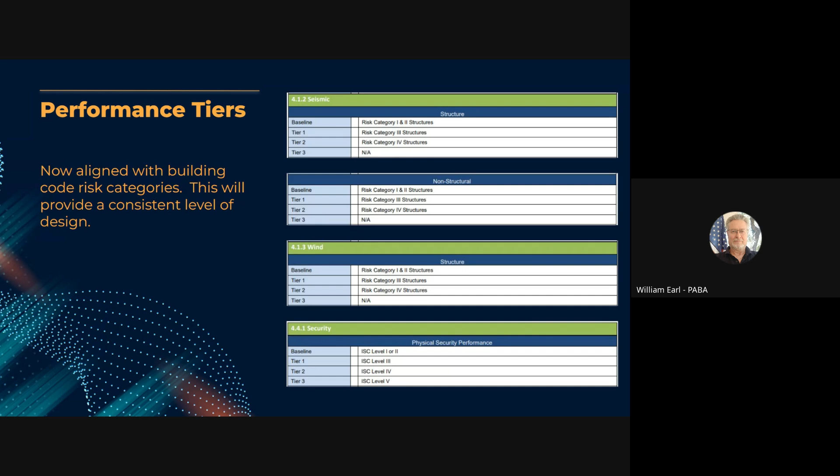Thank you, Bill. I'm Hani Rimawi. I'm a civil engineer. I happen also to be a team member with Bill under the Center of Engineering. So I've been with GSA just shy of 2 years, and coming on board, I took the program management of the civil engineering component here in the P100.

We have some minor updates with a robust change to the flood mitigation sections, and hopefully down the line, as we continue with the updates to the P100, we'll aspire to have a standalone civil section, but we're not there yet, but we hope to be.

Just wanted to share some of the recent news here. It happened earlier this month. The P100 Steering Committee voted and approved the creation of a Civil Engineering Technical Committee. So this committee will be responsible for reviewing any of the waivers that come for the civil engineering section. The group is in the works right now in terms of formation, and we're going to look to have about 5 to 6 members, and have the members at least have coverage across zones A through C. So at least one member from each zone. So that's an ongoing development.

Okay, so the changes we had under civil engineering were minor for the most part, except for sections 4.6 and 4.7, where we replaced the flood mitigation section with a flood resistance design section that also includes a robust implementation of the FFRMS requirement, which is the Federal Flood Risk Management Standard, and also takes the flood requirements that were scattered through different sections, such as mechanical, electrical, and building enclosure, and puts them in one location under the civil engineering section.

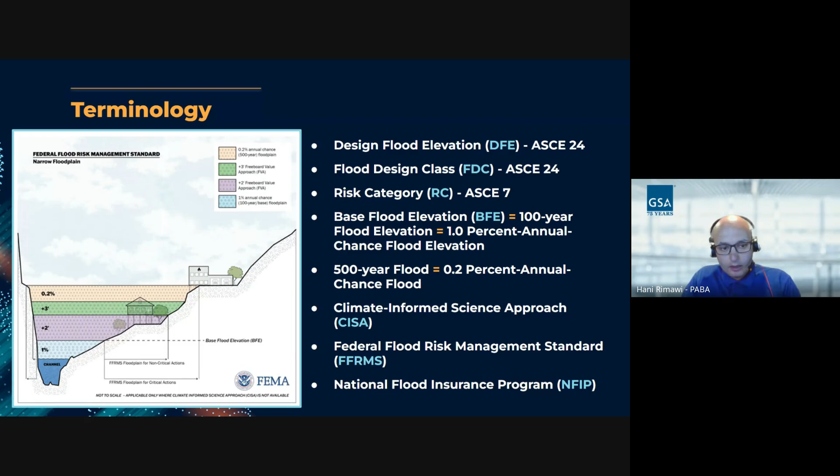So want to highlight here section 1.3.9, the facilities definitions. This was mentioned earlier in Lance's presentation as part of critical action or non-critical action. This is a designation that's essential to have established early on in the project, preferably during feasibility stage. It does have cost ramifications, as you will see in the tables and the next slides. Non-critical action would have a lower standard design. Critical action would have a higher standard design.

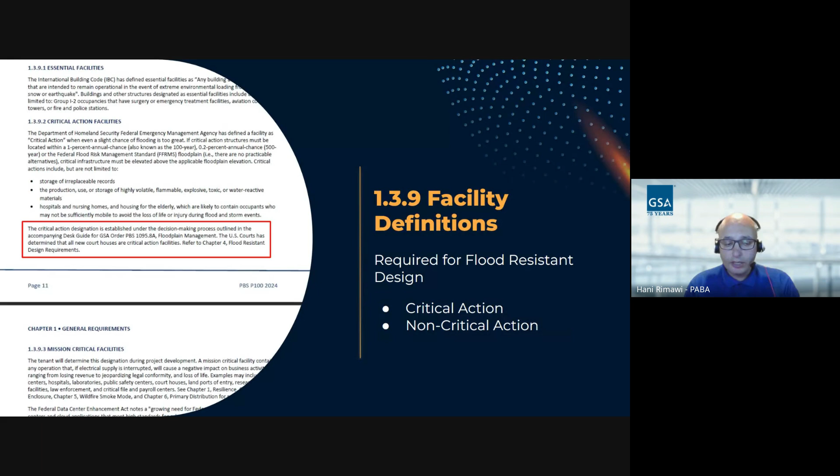And the recent issuance of the Floodplain Management Desk Guide has guidance on how to go about attaining that designation. It would require the customer agency to sign off on a letter letting us know how they want to designate their facility. And if it's something that GSA owns and operates and occupies, then it would fall on us, GSA, to make that determination internally, which falls on the regional level.

So section 4.6, we included the performance table here, 4.6.1. That's a new numbering. Performance, and you'll see the building enclosure on top. So this table is taking into account different categories, one being the building enclosure and site, and then you'll see the mechanical and the electrical and generator in the following slide. So the first slide here, we merged the site, civil, and the building enclosure under one category, and they both share the same design standards.

Under the performance tiers, you'll see two columns, the non-critical action that highlights the design requirement based on the baseline through tier 2. And then you'll see the critical action on the right column, which is the higher risk level to design to. And also you'll see that going through baseline all the way down to tier 2. The DFE term is being used here, again, to be in line with ASCE 24.

For example, for non-critical action, we're looking at the baseline design flood elevation to be the base flood elevation, which is 100 year, plus 2 feet. And then we would have a flood design class set at 2 with the risk category set at 1 and 2.

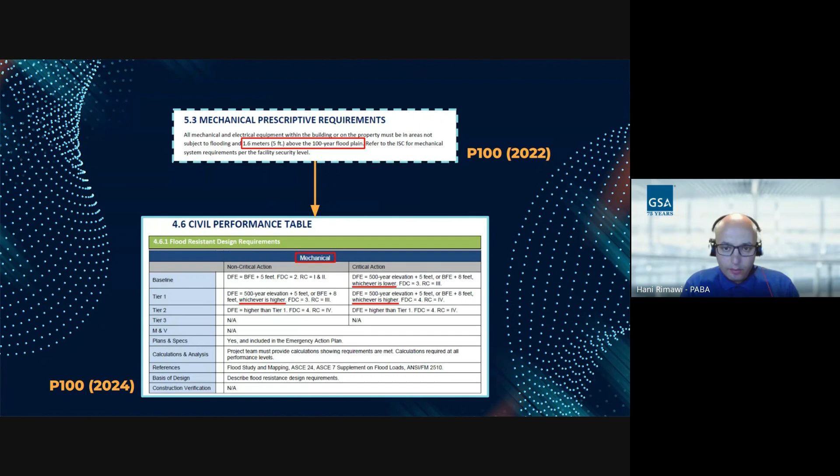So I'm going to the next slide here. Let's see. So the next slide is related to the mechanical. You can see here part of the 2022 section. It was one line. There was no table. It was under section 5.3. We took that and added it into a performance table. And we also created a level for critical action.

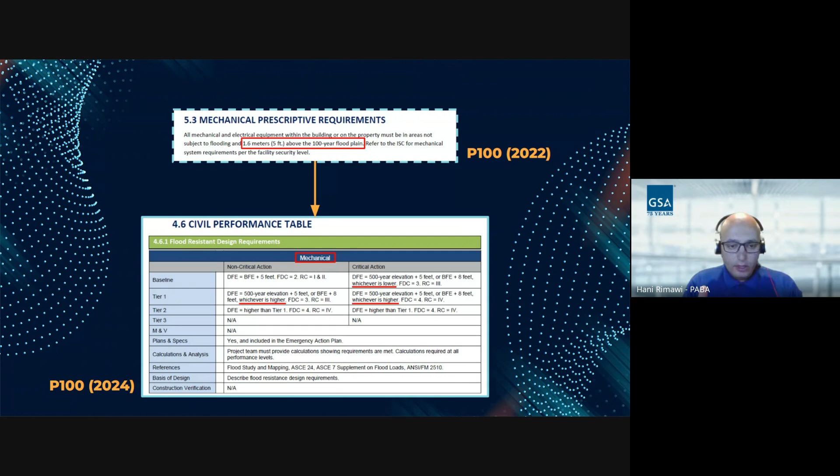So you'll see under non-critical action is BFE plus 5. Under critical action, it goes up to the 500-year elevation plus 5. And this is in line with the electrical components as well. And similarly to the previous table, as you go to the right, it increases, and as you go down the tiers, it increases as well based on risk requirement.

The electrical and generator systems got merged together. Previously under 2022, there were two different sections. Again, the components that were noted as part of that narrative get captured here in the performance table, and they follow, again, the non-critical action designation versus critical action designation.

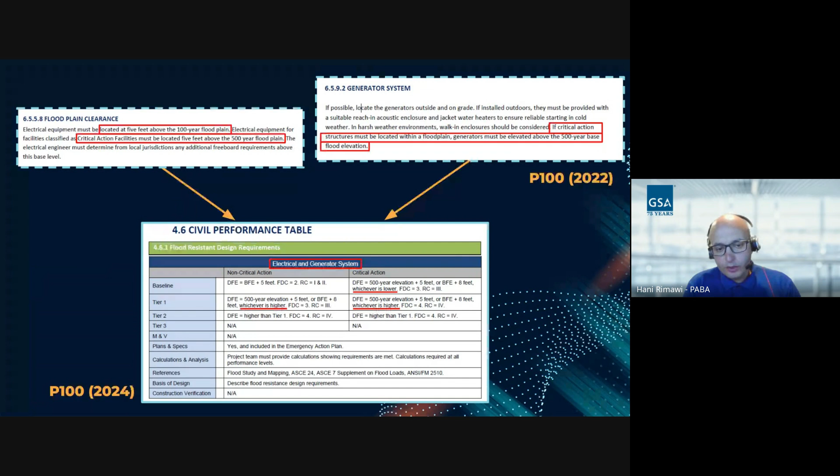Under 4.71, which is the performance attributes, we want to note some of the changes here, being that we have listed available sources for floodplain information, referring to the floodplain management desk guide. In there, there's a list of applicable sources, such as FEMA websites with flood data, localities, or other agencies that might have information they can share.

In the event there's no available floodplain data, we will look for the project team to conduct a hydrologic and hydraulic analysis or flood study to determine and set the design flood elevation. Or if the data that we have, let's say from FEMA, is more than 15 years old, then you should be considering getting a new study completed.

Now, when I say 15 years old, it's not related to the date listed on a map. It's related to the actual analysis for the floodplain, for the riverine or the coastal. FEMA has a habit of taking old maps and recycling them with updated colors, but they still keep the core study from the 1980s or the 70s, for example, from their initial.

So we want to make sure that we are studying the streams or the water bodies that are impacting our site up to date now, not taking something from the 1980s and running with it. And a lot of times what you're going to see out there also, FEMA mapping will include elevations for the 100-year elevation, but it will not include the 500-year elevation.

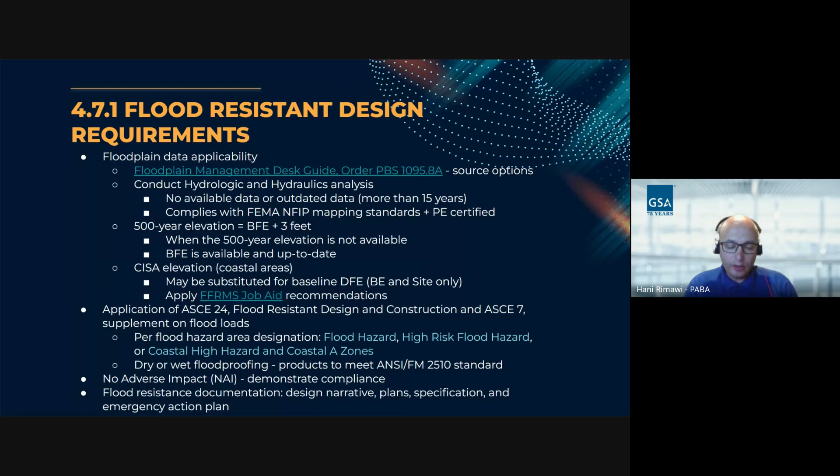And we could require that the team show us pre and post modeling analysis to demonstrate that, and state and local officials could require that as well. So that's something I want to emphasize: no adverse impact. You fill in the floodplain, you've got to make sure that floodplain does not impact somebody next door. So that's something to keep track of as well. And again, as I mentioned earlier, for flood resistance documentation, we want to make sure that the narrative is captured in a clear section, and then the plans and specifications are updated and tracked accordingly to show any flood proofing and flood control.

Under site grading and drainage, we updated the site drainage system. We moved the section from 4.82 under 4.81. And we also clarified that drainage systems, drainage pipes specifically, need to be located in unpaved areas to the extent possible. Now, I know you have to set your inlets, you have catch basins, they might have to cross the pavement. We just want to make it clear to have those pipes placed in unpaved areas to the extent possible. We also emphasize that we want to comply with EISA 438. That's the law, as Brendan mentioned earlier in his presentation, but also we want to make sure that we are in compliance with local stormwater management requirements.

State, county, localities might have stormwater management requirements that could be more restrictive than EISA 438, and we want to make sure we are in compliance with that as well, because that goes in line with the NAI, no adverse impact, to localities and the neighbors.

We also wanted to see a performance analysis done for the proposed drainage. The drainage design, the way it is noted in the P100, is to be designed to a minimum 25-year storm event. So your designers will set that pipe in place, set the inlet locations, the spacing and such, but we want to see how the site behaves under 100-year and 500-year flood conditions to make sure that we're not adversely

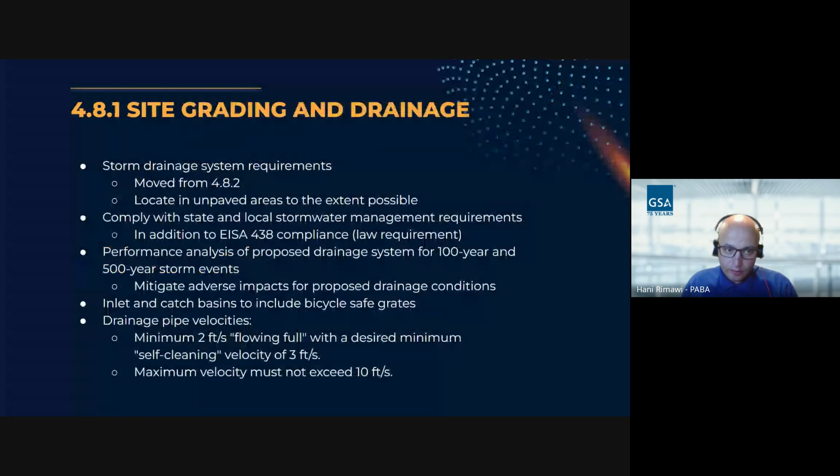So if I go back to the categories that I had before, let me get that table on for you, Ron, so you can see. So as part of our design, let's say for building enclosure and site, we are looking at base flood elevation being the 100-year, and we're adding 2 feet. So that's your freeboard. That freeboard value is supposed to account for future flood rise. That could change down the line as we see how the climate is morphing in the next 50 years. Right now, that's a freeboard value.

That elevation can be substituted with the CISA approach, particularly for coastal areas now. And that is more science driven, and that can have more of a dynamic elevation depending where you are in the country. The inland for the CISA approach is not there yet. So hopefully when that comes, we might lean on that more, because that's going to be more precise information that we know based on climate change.

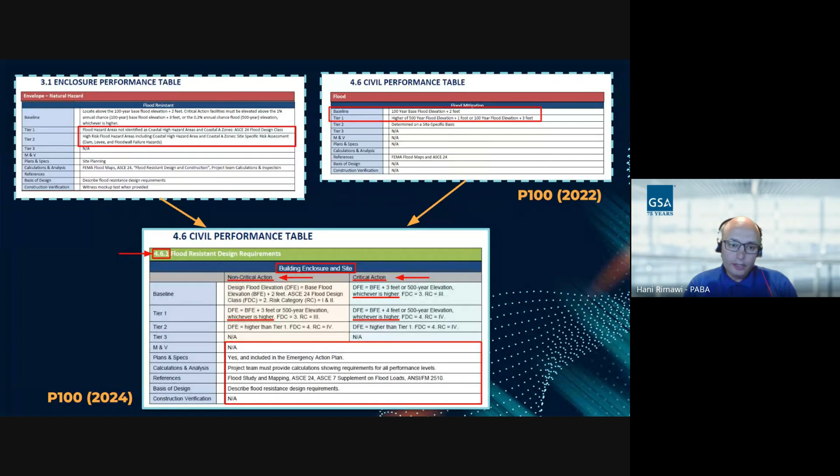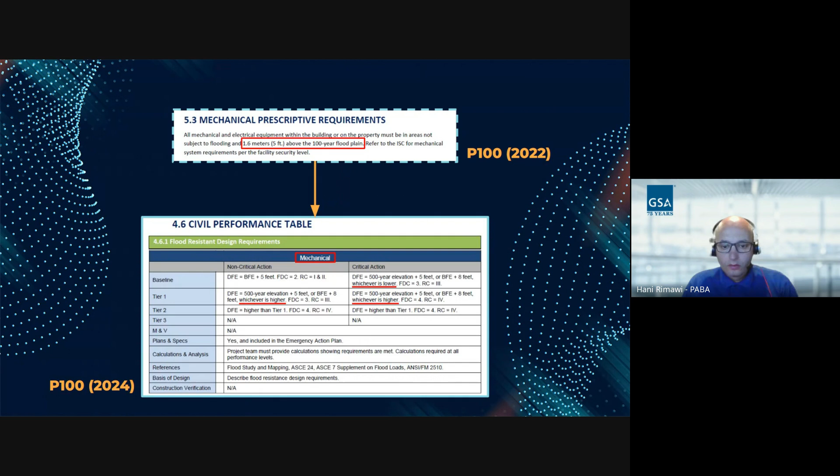But right now we are using more of the freeboard value approach as it relates to the FFRMS requirements, which is including the buffers. In this case, 2 or 3 feet. And if we move to the next sections, it's 5 feet for the 100, or 5 feet for the 500. Any other questions?

And again, I encourage you all to look at the training we had for the new floodplain desk guide we conducted early this year as part of the A&E series. You'll see Brendan and I talking on the implementation of that guidance. So feel free to check it out.